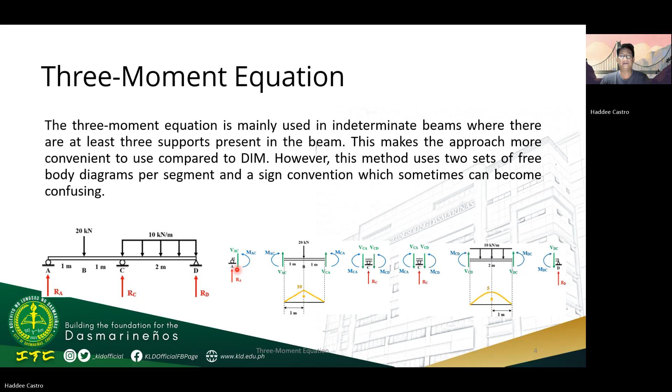So, this is mainly used for indeterminate beams. As you can see from this example figure, it is divided into two segments, di ba? So, kailangan may dalawang segment and at least 3 points. So, yung segment, hinati, and then ibubukod natin yung mga supports niya. So, paano ba natin ginagamit ang three-moment equation? Ito yung mga procedure.

Divide natin the beam into segments separated by supports. Take note that for fixed ends, i-extend natin to with a segment that has an infinitely large area, moment of inertia, and a variable length. For free ends, obtain an equivalent system where the segment with the free end is removed, with its internal shear and moment nearest to the adjacent support applied at the end point as external forces.

And then for each segment, assume the internal moments at both ends to be positive. So parang assume natin na mag-smile yung bawat segment. Paano yung mag-smile? Yung left side ng beam dapat clockwise, and then yung right side naman dapat counterclockwise. There's no need to consider the internal shear force at this point muna. Later on pa yun.

For each segment, consider the applied loads. Derive or draw the moment diagram of the segment assuming that it is a simply supported beam without end moments. Then apply the three-moment equation in order to solve for the internal moment. So ang focus natin dito sa three-moment equation is the internal moments M1, M2, and M3. Ito yung formula niya. Then using the segment, calculate the internal shear, followed by the reactions.

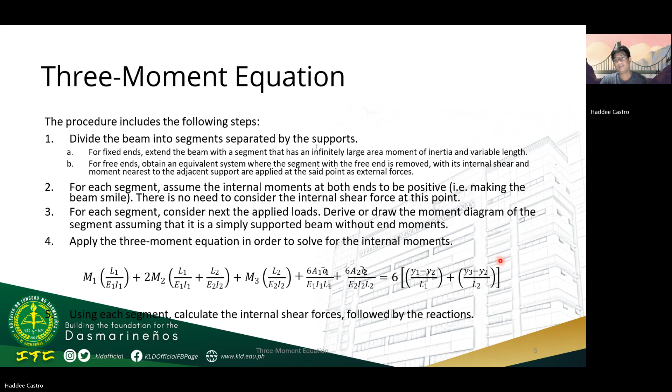And then itong small a bar, ito naman yung distance ng centroid ng moment diagram papunta sa kaliwa. And then yung b bar naman, yun yung distance ng centroid ng moment diagram ng second segment papunta naman sa kanan. And then yung Y1, Y2, Y3, yan yung mga deflection bawat points. So let us determine the reactions of the support para mas maintindihan natin yung three-moment equation, using this example.

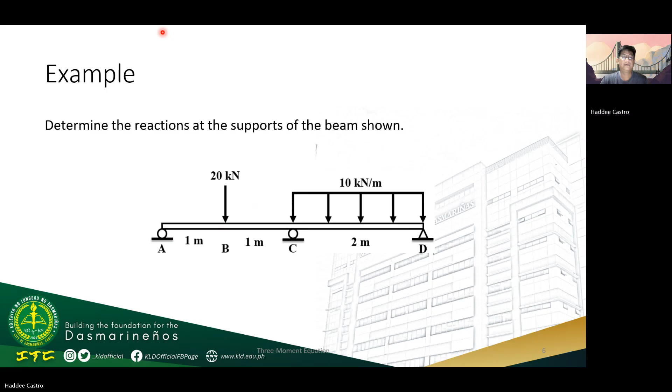Let us identify the points 1, 2, and 3. Syempre, yung mga points natin dyan are A, C, and D. Dito tayo maglalagay ng points. Bakit ito yung i-identify ko? Kasi these 3 points have known deflection; alam natin ang mga deflection dito is 0. Hindi magde-deflect yan dahil sa support. So, in this case, points A, C, and D will fit the requirement.

This gives the following correspondence in the internal moment. M1 will correspond to moment from A to C, MAC. M2 will correspond to moment from C to A, MCA, which is also equal to the moment from C to D. And then moment 3 naman natin, that will be MDC. All moments are assumed to be positive, thus the moments appear to cause positive bending.

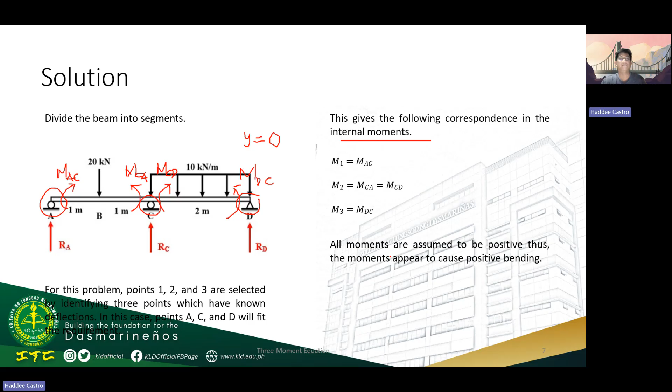Ihati-hati na natin yung mga segment. Unahin natin si segment AC. Ito yung point C where the support RC is located, and then RA naman sa A. Assume natin na simply supported itong segment AC, so magkakaroon siya ng reaction dito na VAC and then VCA.

We can now draw the moment diagram of this 20 kilonewton. Alam na natin kung paano mag-draw ng moment diagram. It is a straight line triangle, nasa gitna. The centroid, obviously, nasa gitna because of the symmetry, so this will be your a bar. And the area of the moment diagram is 1/2 multiplied by 2, so it is 10. That is area 1. From this point, when we sum moment at A equals 0, we can get MAC equals 0.

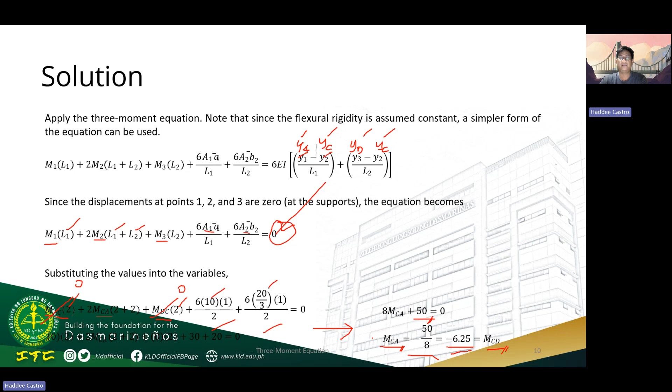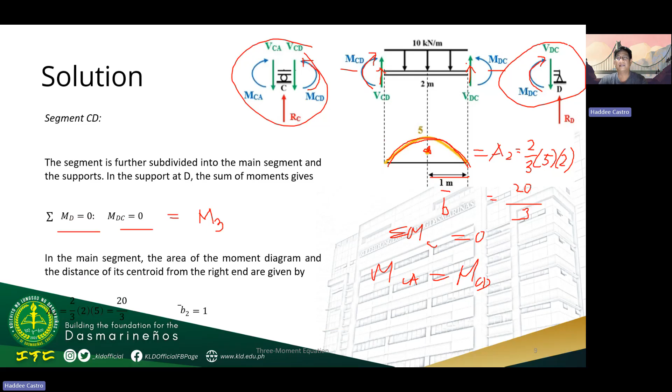And then 2 times 4 is 8 MCA. Therefore, MCA is equal to negative 50 over 8 or negative 6.25. And this is also equal to MCD. Bakit equal yung MCA sa MCD? As you can see from this segment, summation of moment at C equals 0 will give us MCA equals MCD. And as you can see, negative yung result nito. Ibig sabihin, mali yung assumed direction ng MCA and MCD. So itama na natin. MCD is counterclockwise pala, and MCA is clockwise.

So, ito na yung corrected niya. Hindi ko na nilagay si MAC since 0 naman siya. Focus muna kayo dito sa segment AC. We can now solve for VAC and VCA using equilibrium equations. When we sum moment at C equals 0, counterclockwise positive, we get negative VAC times 2, plus 20 times 1, minus 6.25. VCA wala na kasi dito ka nag-moment. Therefore VAC is equal to 6.875 kilonewton upward. Summation of vertical forces: 6.875 minus 20 plus VCA equals 0. Therefore, VCA is 13.125.

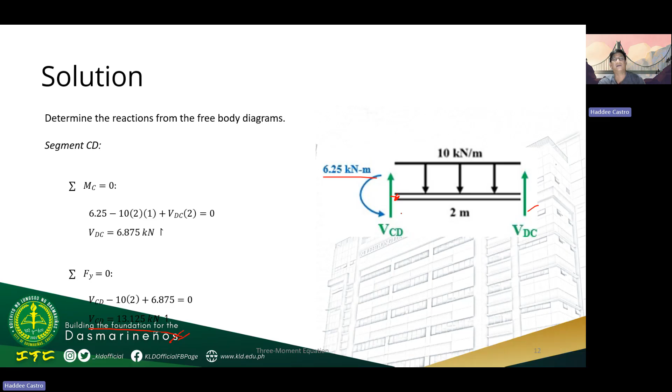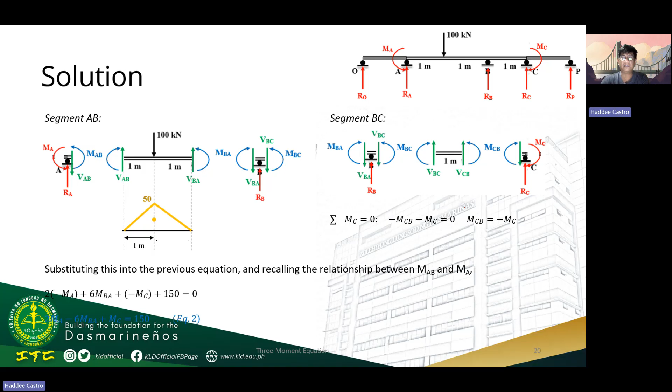And then, si MCB, as you can see, from this segment, when summation moment at C equals 0, we can say that MCB is the negative of MC. Yun yung reaction ng MC. So, lagay na natin si MC dito. So, this will be your equation 2. That is 2MA minus 6MBA plus MC equals 150. So, nadagdagan yung unknown, yung MC. So, we need an additional equation to be able to solve all the internal moments using three-moment equation.

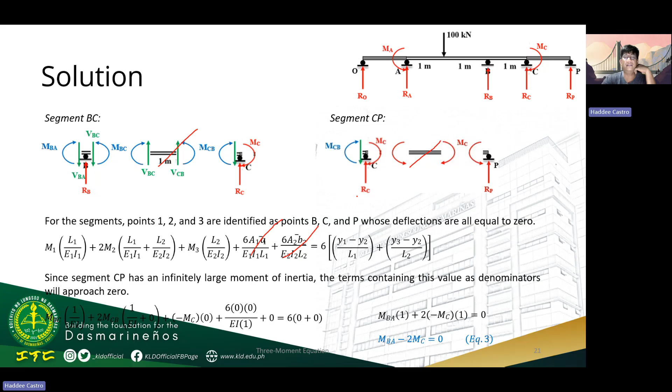So, meron pa tayong segment BC tsaka segment CP. Ito mas madali kasi walang load. Automatic to, 0, 0. And then, ang points natin dito is B, C, and P. So, hindi rin magdi-deflect yan, 0 na naman. And then, as you can see, this is infinitely large moment of inertia. Will become also 0. Yung EI2 niya, itong second segment, infinitely large, so this will also be 0.

So, ano na lang mga natira? So, itong M1 natin is MBA multiplied by 1 over EI plus 2MCB multiplied by 1 over EI, plus MCB. Alam natin na MCB is the negative of MC. And then this is also negative ng MC. So ito, wala na to, 0 na. So MCB is negative MC. Pag sinubstitute natin lahat, ito na lang matitira.

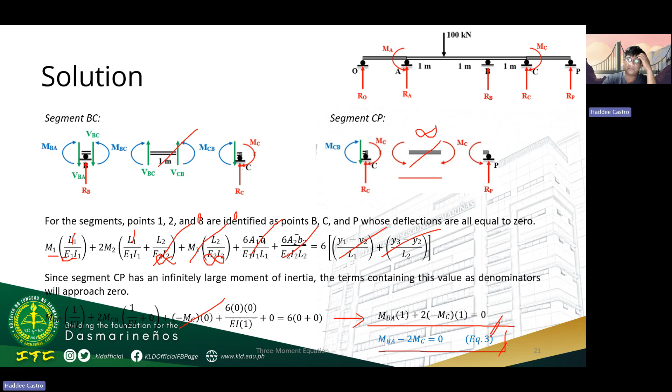So MBA times 1 plus 2 times negative MC times 1 equals 0. This is your last equation. Solving it simultaneously using your calculator, MA will become 29.17, positive result, so tama. And then MC is negative 25 over 3 or 8.33 kilonewton meter counterclockwise. Clockwise yung assume natin kanina, counterclockwise pala to. Yan yung corrected.

MBA is 16.67 kilonewton meter, also equal to MBC. Negative yung result, it means na hindi pala siya mag-i-smile, magfo-frown. So, corrected na. We can now solve for VAB and VBA using equilibrium equation. Summation moment at B equals 0 will give us VAB equals 56.25 kilonewton upward. Summation force vertical equals 0 will give us VBA equals 43.75 kilonewton upward.

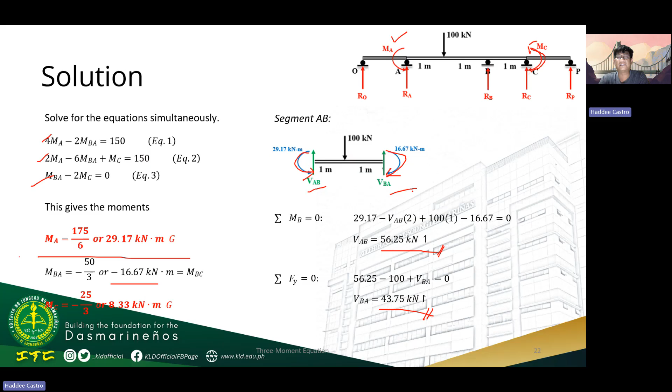So, kumpleto na to. Proceed tayo sa segment BC. Ito na yung corrected na direction ng mga internal moment. We can solve VBC and VCB using summation moment at C equals 0 for segment BC. We will get VBC equals 25 kilonewton upward. Summation force vertical equals 0, we will get VCB equals negative 25 or 25 kilonewton downward. So ito lang yung namali na shear.

Transferring all the shear to the supports, we will get RA is 56.25 upward. At support C, RC equals 25 kilonewton downward, kasi negative yung result. And RB, summation forces vertical equals 0, will give us 68.75 upward. So we have been able to solve the reactions of this double fixed beam. That's the procedure of how to use three-moment equation in analysis of indeterminate beams.